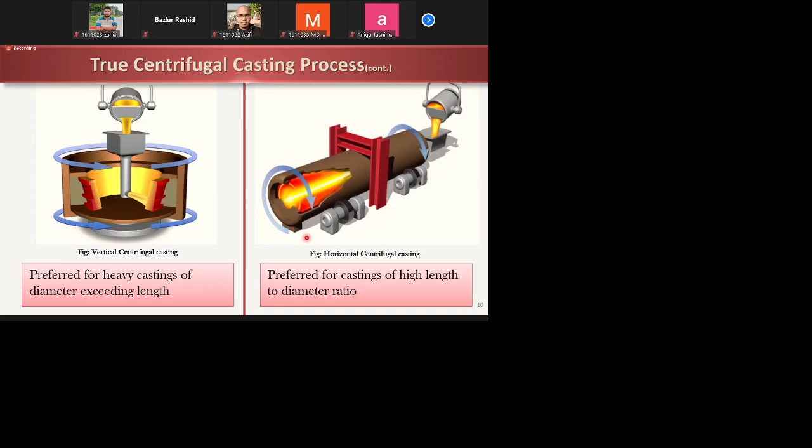If we talk about the basic mechanism of a true centrifugal casting process, the first step is application of coating to the inside mold wall with refractory slurries, sand, graphite, etc., so that the casting does not get stuck with the mold wall. After coating application and drying them, molten metal is poured directly into the mold.

The mold is continuously rotated at a predetermined speed. After solidification, the casting is extracted from the mold, and during this process, centrifugal force lets the less dense impurities move towards the center and get stacked up there. It can be easily removed by machining, grinding, or sandblasting.

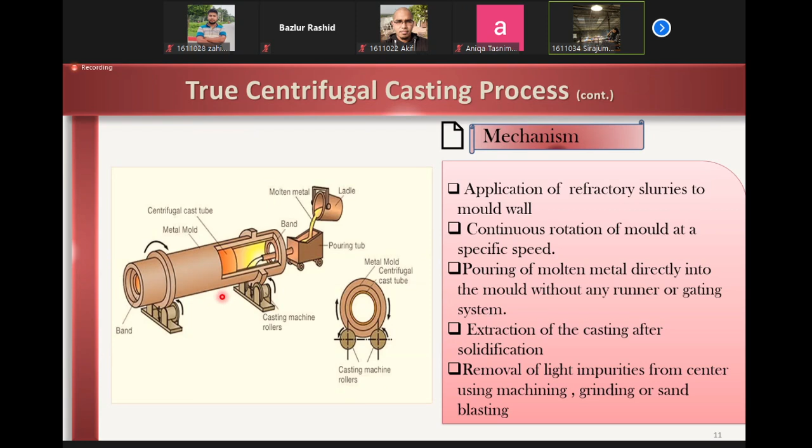The advantages of this casting process are many. Some of them include flexibility in casting composition, production of large castings, no use of core to make cylindrical hollow parts, no need of gates and feeders as casting is directly poured into the mold, and also few fettling costs.

Fettling means removal of unwanted metals or entities from casting.

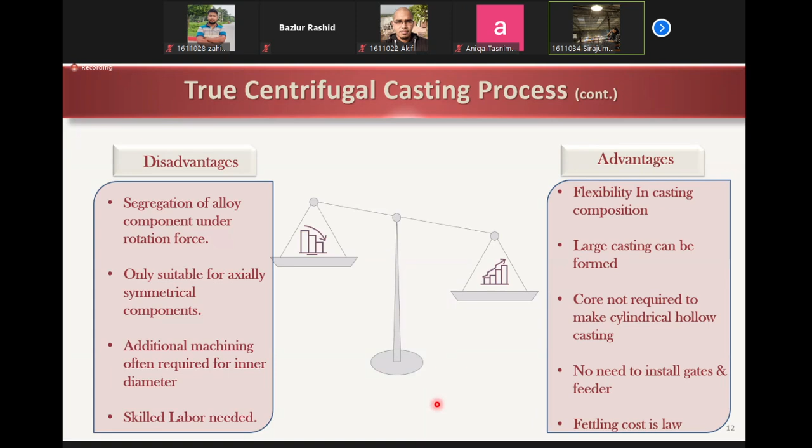This process has some drawbacks also, as centrifugal force compels lighter entities to move towards center. Segregation of alloy can happen. This method is suitable for only casting axially symmetrical components.

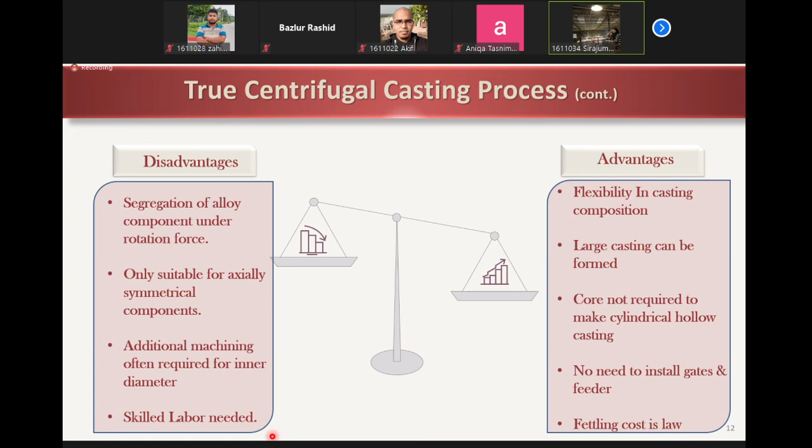As core is not used, inner diameter often requires secondary machining after casting. Also, this process requires highly skilled labor.

Now going to the next type, which is semi-centrifugal casting process. It is carried out on a vertically mounted machine at comparatively low rotating speed than the true centrifugal process. The main difference between true and semi-centrifugal process is that the mold is completely filled through a central sprue.

During casting, rotational speed ensures uniform distribution of molten material to the casting. More than one item can be produced at a time in this method because multiple molds can be stacked and fed by the central sprue.

Components like wheels, sheaves, blanks, etc. can be produced using this method.

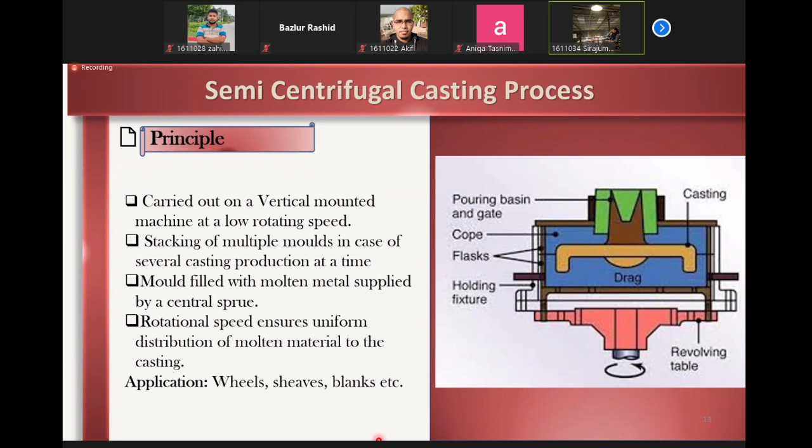The last one is centrifuge casting process. It is used to cast unsymmetrical castings in a group. Molds containing cast geometry rotate around the central sprue.

Runners are used to provide liquid metal to the molds from the central sprue. This whole structure increases filling pressure within the molds, which allows casting with complex shapes. This is economical in nature as many castings can be manufactured at a time.

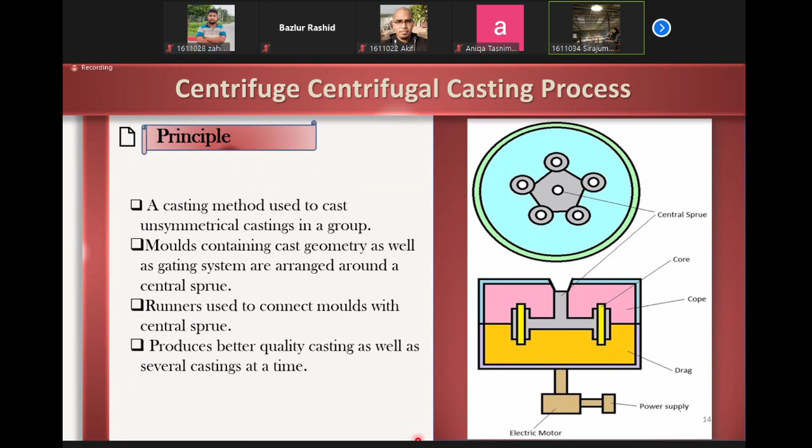Generally, in permanent molds, pouring temperature of molten metal is 40 degrees Celsius higher than that in sand mold. This is because of rapid chilling effect of permanent mold, and for the same reason, pouring rate, especially the rate at the beginning, must be very high compared to the sand molds.

At the beginning, the pouring rate must be very high compared to sand molds. Otherwise, cold laps and cold shuts may occur.

Also, it is always good to use a pouring funnel to ensure the entry of molten metal in the direction of mold rotation. It will provide better casting quality by minimizing turbulence.

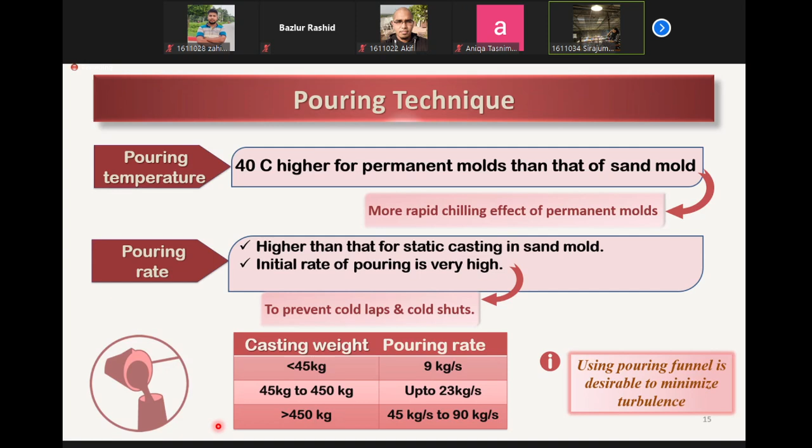We have already discussed about how directional solidification works in this process. Here, heat is only removed through water-cooled mold wall. And these are the parameters which influence solidification.

Parameters with greatest effects are mold thickness, mold wash thickness, and degree of superheat. How this affects local solidification condition will be discussed later.

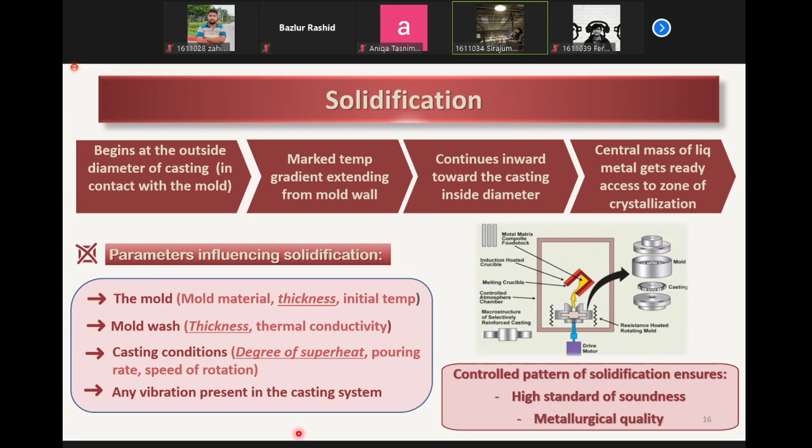Control pattern of solidification is very important as casting soundness and metallurgical quality greatly depend on it. As high feeding pressure is a must for directional solidification, obtaining this is the primary aim of the casting technique.

To take the full advantage of centrifugal force, mold cavity must be shaped or selectively chilled according to the principles of directional solidification to produce solidification from periphery towards the center.

Basically, central mass of liquid metal does the function of feeder head used in static casting. So it is positioned at the center and is sufficiently large to induce favorable temperature gradient.

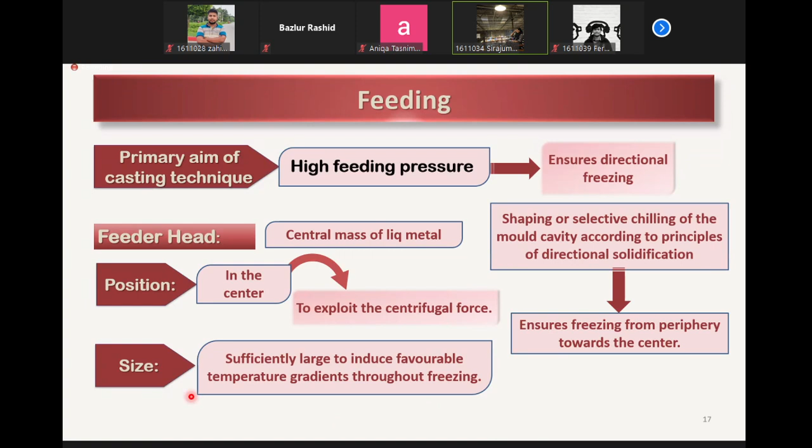Selection of mold is an important factor of this casting process. It basically depends on geometry and quality of casting and also the materials used to be cast. Usually permanent molds are used in centrifugal casting process, but sometimes expendable molds as liner are used also.

The most common permanent mold materials include graphite, steel, copper, etc. Among them, graphite molds are an economical alternative to sand for producing small castings, and steel molds are used to cast large quantities.

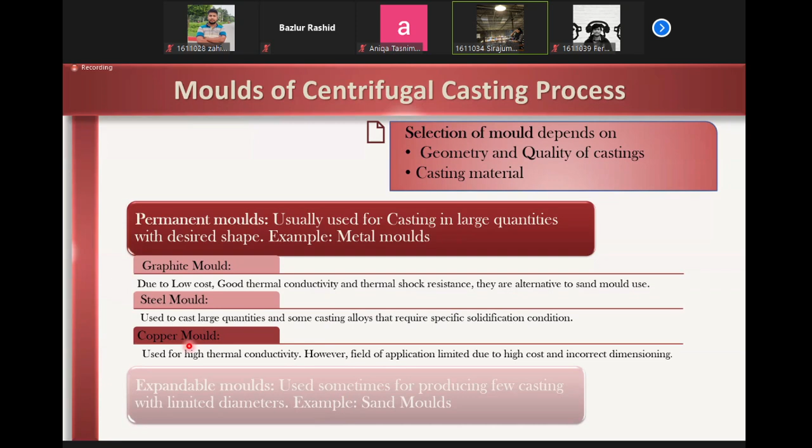The main variables that control casting quality are speed of rotation, pouring temperature, pouring speed, mold temperature, etc. At first, speed of rotation. The main effect of high speed is to promote grain refinement, although this can also bring about turbulence.

This is because of instability of the liquid mass at very high speeds, but it's better to use the highest speed of rotation possible without encountering hot tearing.

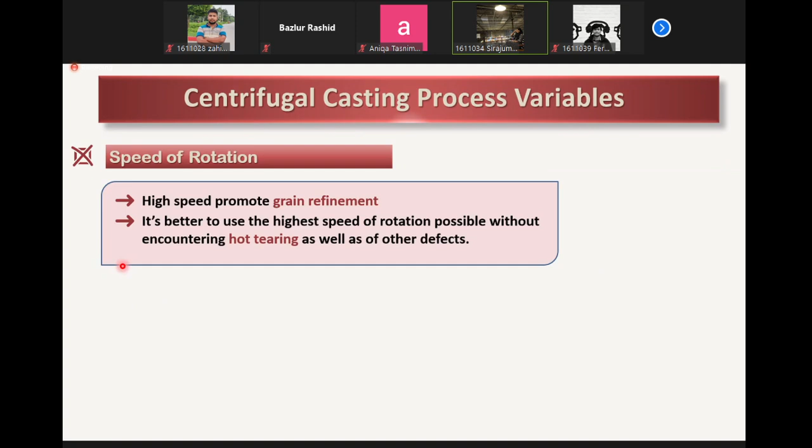Then pouring temperature. It has a major influence on the mode of solidification. Low temperatures are associated with maximum grain refinement with equiaxed structure, and high temperatures promote columnar growth in many alloys.

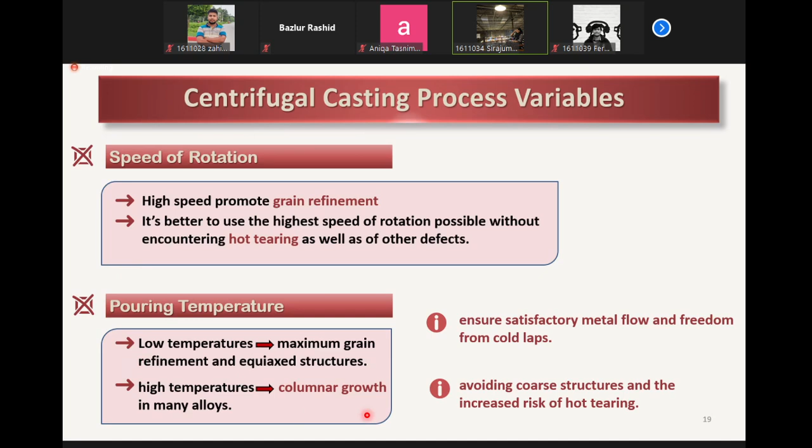The pouring temperature must be sufficiently high to prevent cold laps while still avoiding coarse structures and the increased risk of hot tearing. Pouring speed depends on the particular metal being poured, as we need to finish the delivery of the molten metal before the metal becomes sluggish.

Too high pouring rate can cause excessive turbulence as well as raining. Low pouring rate promotes directional solidification and feeding. It also reduces the risk of hot tearing.

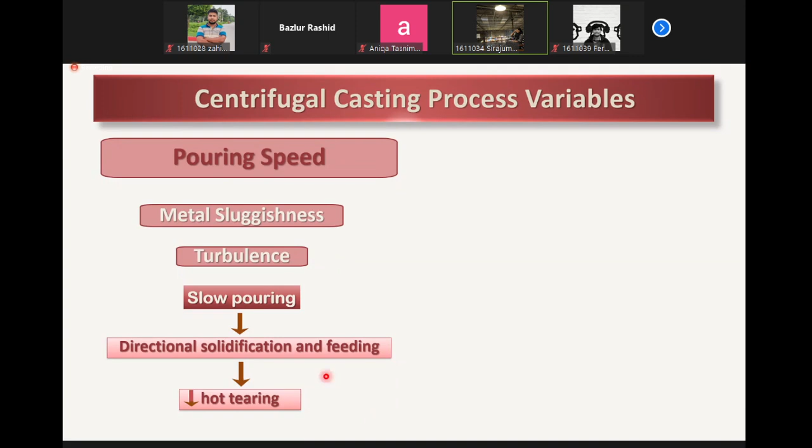Temperature of molds should be maintained in the range of 500 to 550 degrees Fahrenheit. Mold preheating to this temperature range will facilitate the application of the refractory mold coating. A uniform operating temperature is needed to ensure a quality casting.

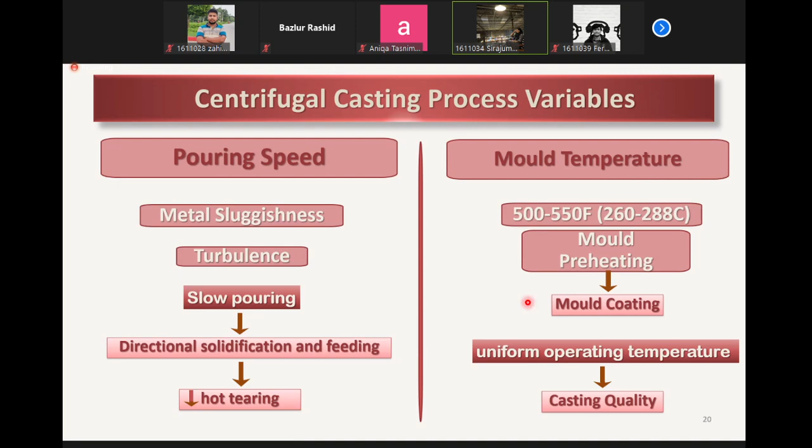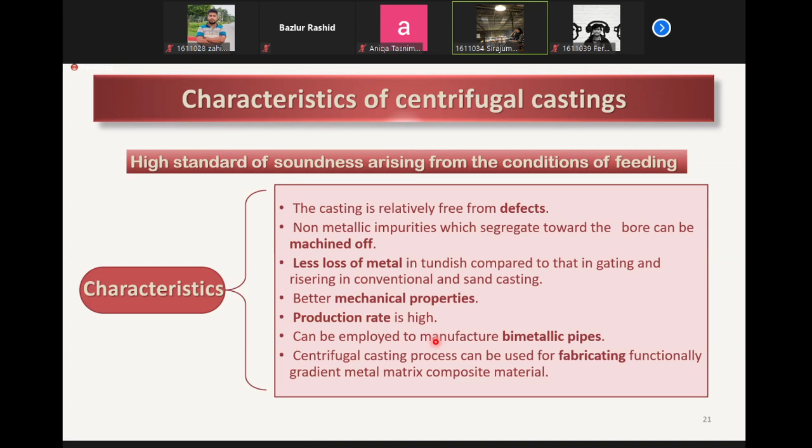Centrifugal casting is used where we require strength, reliability, and material soundness in the end product. The basic characteristic of centrifugal casting is that it is relatively free from defects. We encounter less loss of metal and the production rate is very high. Also, we get better mechanical properties, and this method can be employed to manufacture bimetallic pipes and other specialties.

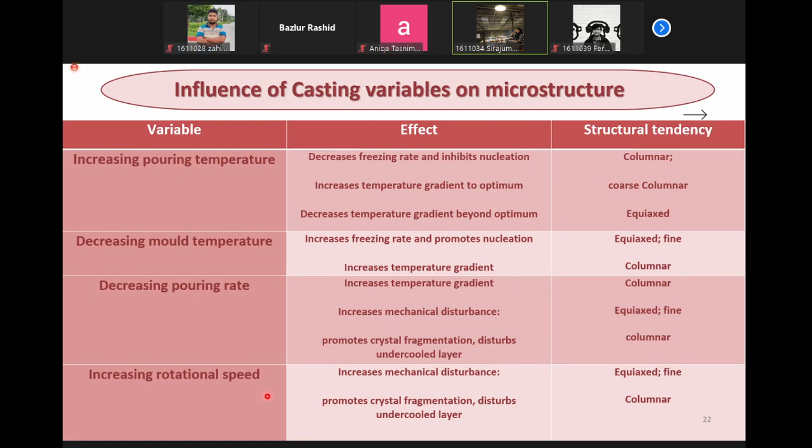This slide summarizes the effects of all the process variables on the microstructure of the final product. From this, we can see that if we increase the temperature gradient to optimum, we can get a columnar structure. And if we increase mechanical disturbance by any means, we can get an equiaxed fine structure.

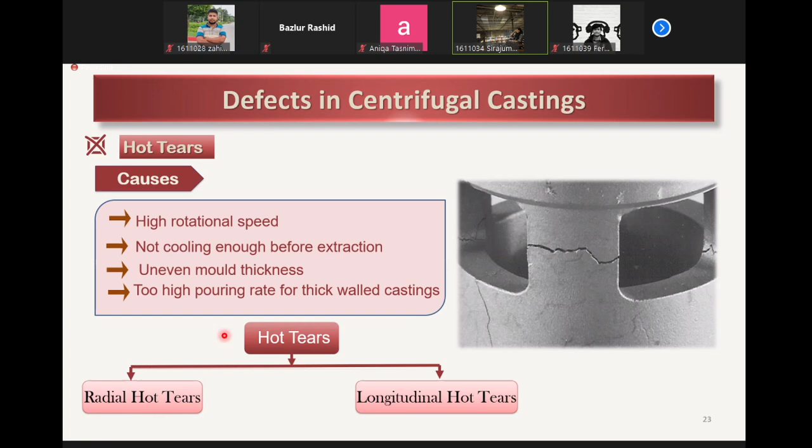A number of defects occur in centrifugal castings, which can be related to pouring, spinning, temperature, material, or coating. Hot tears are developed in centrifugal casting, especially for high rotational speed. They can occur across the circumference of the casting or transversely across the casting. They can be caused by several different reasons, like not cooling enough before extraction, uneven mold thickness, too high pouring rates, especially for thick-walled castings, etc.

So what can we do to remove hot tears? Firstly, we should check our water cooling nozzles. They should be free of debris and unblocked, so water can flow freely. Also, enough water pressure should be ensured, and applying more water and reducing spin speed sometimes help to solve this problem.

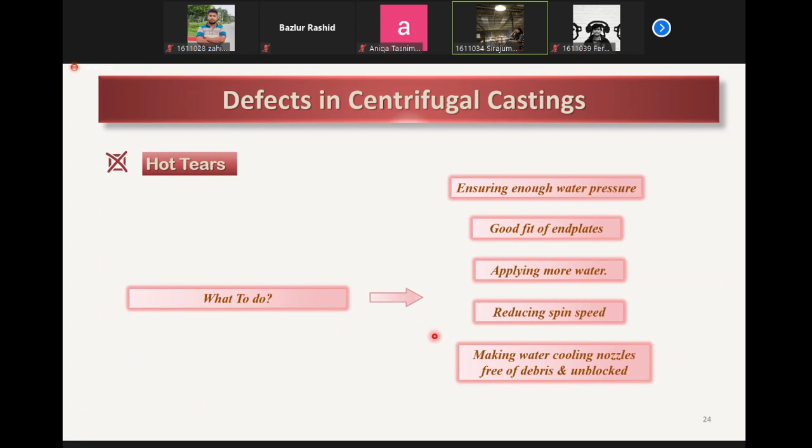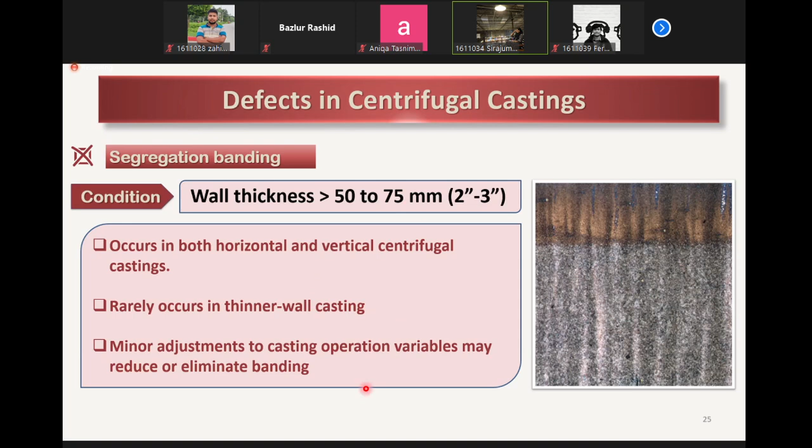Another type of defect is segregation banding, which occurs only in true centrifugal casting. Generally, where the casting wall thickness exceeds 50 to 75 millimeters, it rarely occurs in thinner wall casting. Minor adjustments to casting operation variables like rotational speed, pouring rate, and metal and mold temperatures will usually reduce or eliminate banding.

Raining is a phenomenon that occurs in horizontal centrifugal castings. If the mold is rotated at too low speed or if the metal is poured into the mold too fast, then the metal actually rains or falls from the top of the mold to the bottom. Proper process control can eliminate raining.

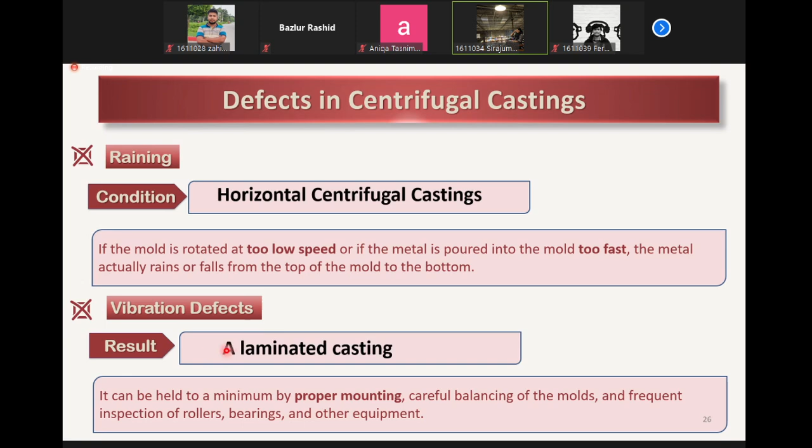Then the vibrational defect. Vibration can cause a laminated casting. It can be held to a minimum by proper mounting, careful balancing of the molds, and frequent inspection of rollers, bearings, and other equipment. Now let's look at the huge application sector of this method.

Regarding production of rotationally symmetric products, this method is a front runner, being used in mass producing blanks, pipes, etc., as well as in the cutting-edge aerospace industry. Another advantage is compatibility convenience. We can cast a variety of metals, alloys, and ceramics in this process. All in all, very versatile in adapting to industry needs.

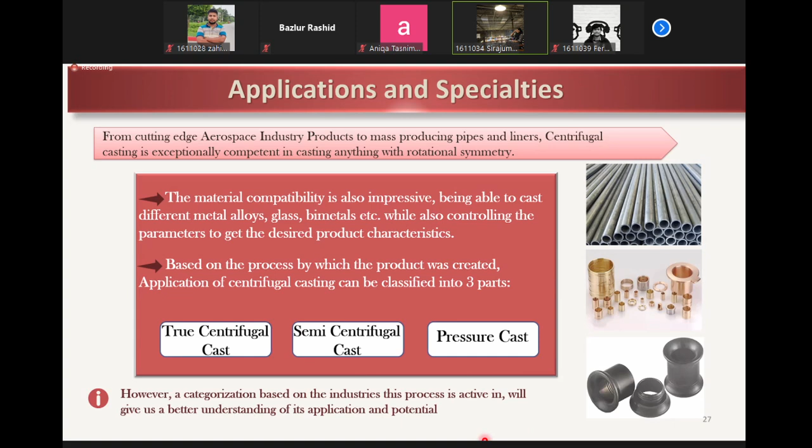Based on the production technique, we classify centrifugal casting into three categories: true centrifugal cast, semi-centrifugal cast, and pressure cast. However, looking at industries where this process is active will give us a more comprehensive understanding of the method's application and its potential. Here we take a look at the mass-produced products this process is responsible for.

Firstly, true centrifugal cast products can be directly obtained from casting or after a bit of machining. Pipes and tubes dominate this sector, but there are rings and liners as well. The semi-centrifugal process is mainly used for producing gears and gear blanks. And while the pressure centrifugal casting method produces intricate hinges, jewelry, biomedical apparatus, etc., a thing to note is the variety of materials that can be used here.

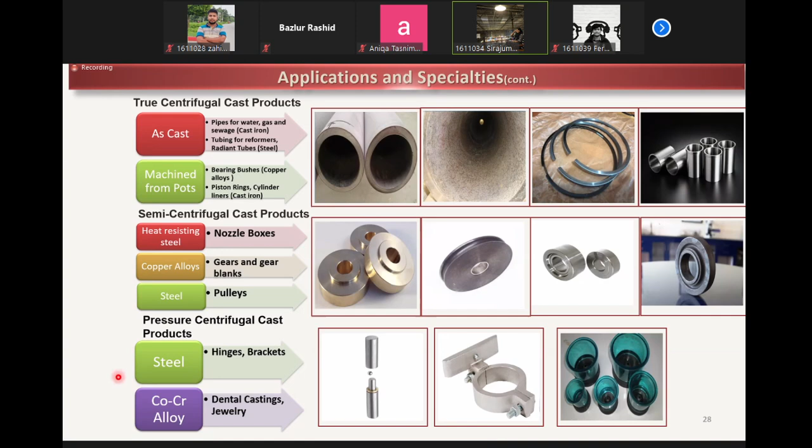Now we shift to the specialized high-tech industries. Precision and accuracy is vital, and centrifugal casting can meet those requirements. Aircraft manufacturing, from fuselage supports to drum brakes and many components of the engine, needs a lot of high-quality circular components that this method provides, like propeller hubs, cast rings, flanges, shaft sleeves, etc.

The automobile industry requires a high volume of mechanical components while also needing a certain degree of precision. Due to the quickness of the method, supply can keep up with demand. Some examples of automobile manufacturing are cylinder liners, piston rings, bearing bushes, etc.

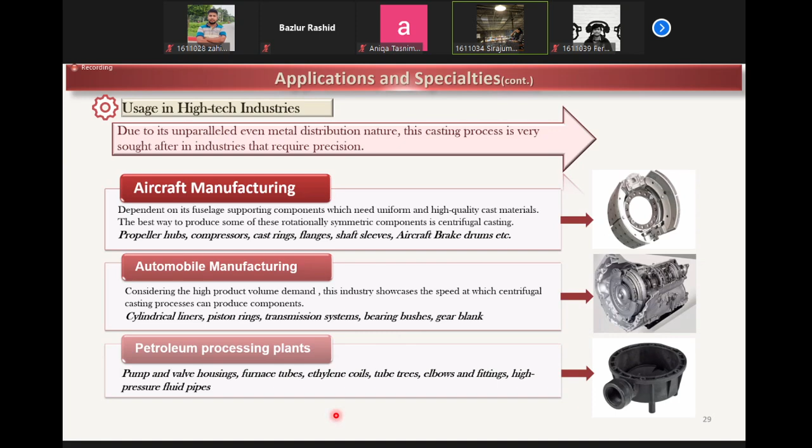And then petroleum processing plants. The examples are tubes, valve housings, high pressure pipes, etc. Long-lasting, high reliability components are needed in this industry.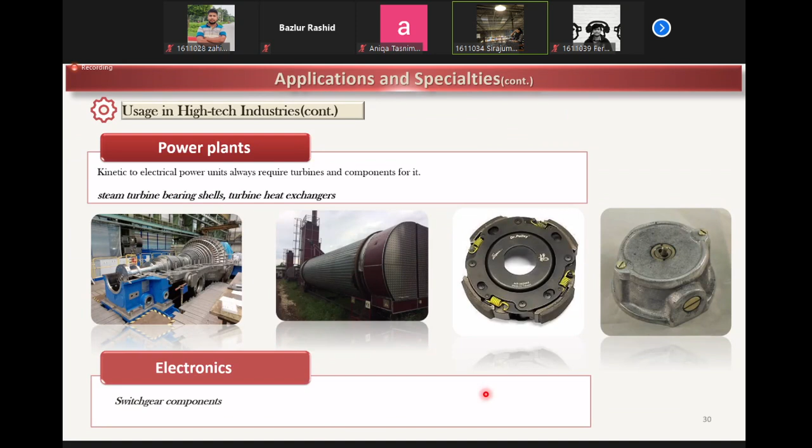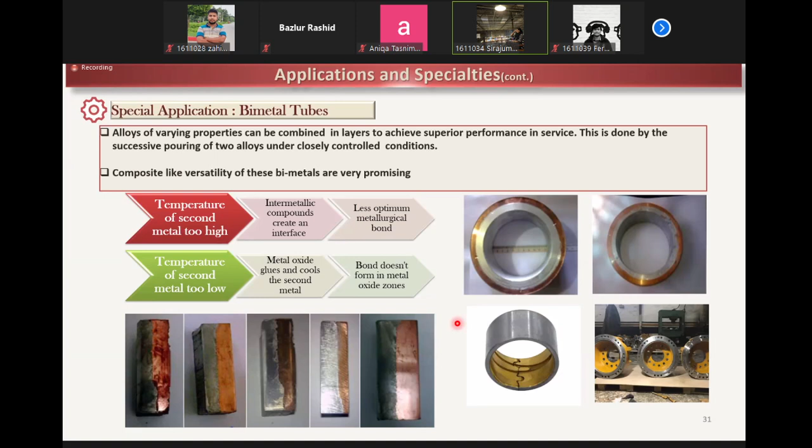Bimetals perform similar to metal composites. Alloys of different composition can be layered to produce specific mechanical properties. This field is still growing and new research is ongoing, but these conditions and variables for bimetal production have to be carefully controlled. Especially the addition of the second layer has to be temperature and speed controlled, otherwise proper metallurgical bonds between the layers cannot be created.

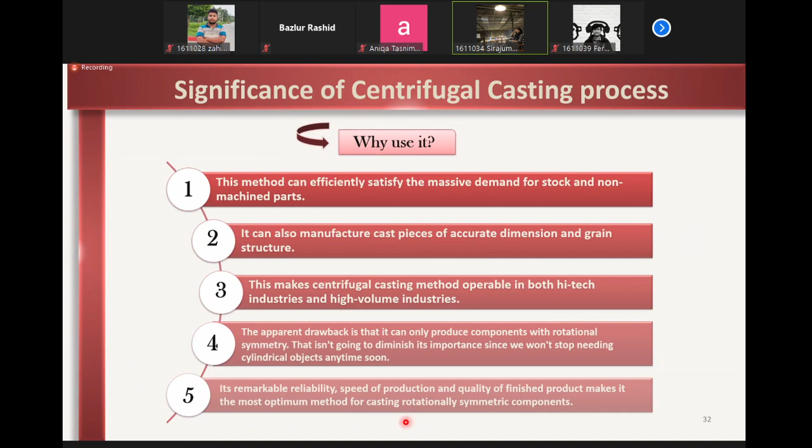This method is very well-rounded in its production speed and accuracy. While it can mass produce pipes and liners, it can also produce race car brake pads. This method is versatile enough to exist in both high-tech and high-volume industries. Geometry is limited here; only rotationally symmetrical objects can be cast in this process, but it is the most optimum way of casting this particular geometrical shape. Thank you.

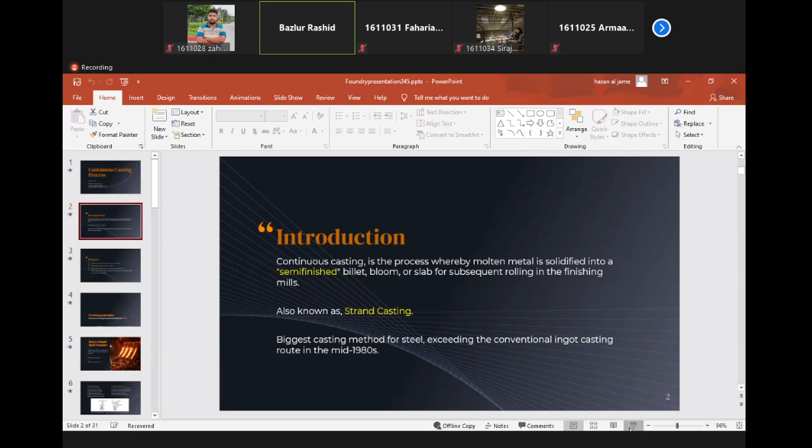The continuous casting process was first conceived by Bessemer in 1858. It is the process where molten metal is solidified into a semi-finished billet, bloom, or slab for subsequent rolling in the finishing mills. This process is also known as strand casting.

Continuous casting is very much in demand nowadays. If we look at the scenario today, most modern steel makers have continuous casting units, and they produce slabs, blooms, or billets from continuous casting, which are then further converted.

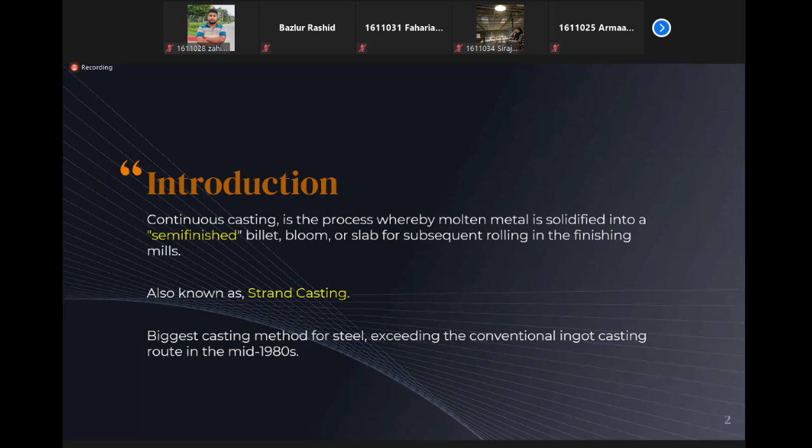So what's the main purpose of this process? For over a century, the traditional method for converting steel from the liquid phase to the solid phase was by using ingot molds. In conventional mold casting, we use a sand mold or a metal mold. The liquid metal is poured into the mold and allowed to solidify. This ingot is then taken for further processing, like reheating, and then its dimensions are reduced.

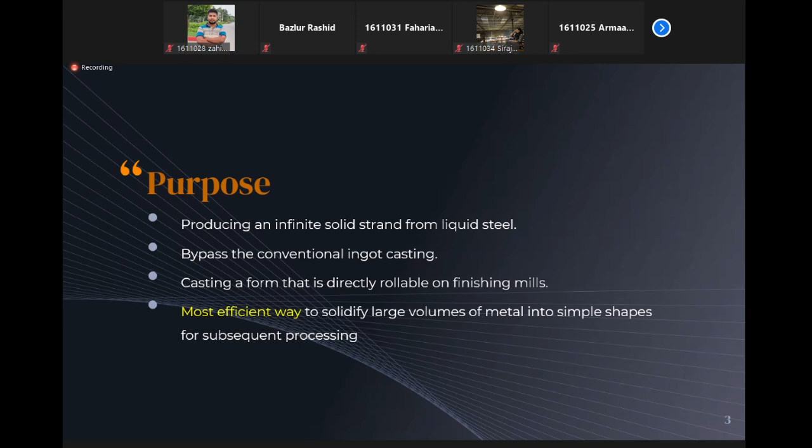All these steps are time consuming and energy intensive. The continuous casting process shows a way to bypass conventional ingot casting, and we can get casting in a form that is directly rollable in finishing mills. This is the most efficient way to solidify a large volume of metal into simple shapes for subsequent processing.

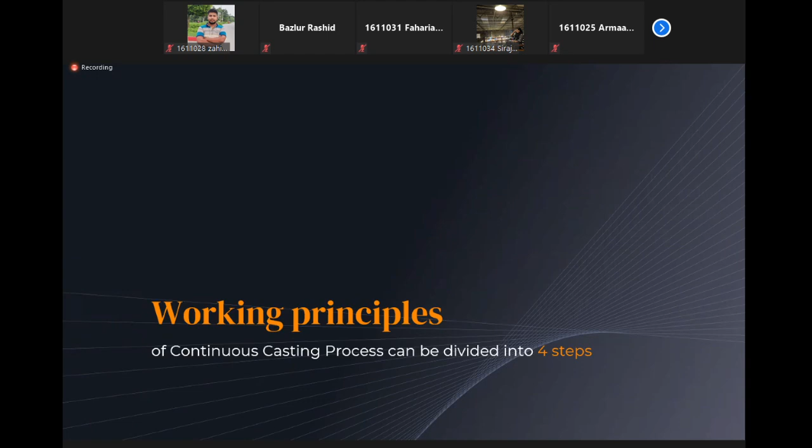Now let's look at the working principle of continuous casting, which involves four steps. The first step is the transfer of liquid metal from the ladle into the molds, and it is a two-step process: first, transfer from the ladle to the tundish, and then from the tundish to the mold. The liquid metal is transferred from the ladle to the tundish through a shroud located just below the ladle.

The shroud is submerged into the metal in the tundish. The tundish helps in the process of removing inclusions. The idea is to utilize the total residence time. Inclusion removal is done during that time, and it can happen in two ways: flotation, and absorption by adding flux on the tundish surface.

The tundish provides a continuous flow of liquid metal and maintains a steady height just above the nozzles that connect the tundish to the mold. Moving to the next process: the transfer of liquid metal from the tundish to the mold.

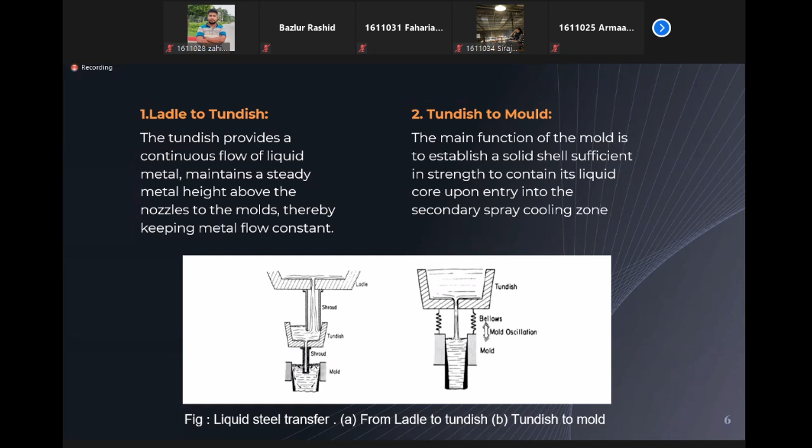The liquid metal enters the mold in the presence of flux through the submerged nozzle immersed in the liquid steel, and solidification starts at the mold. As I mentioned earlier, we add flux powder. Let's take a look at the role of this mold flux.

Mold flux is poured on top of the molten liquid in the mold. The flux then melts and penetrates between the mold surface and the solidifying strand to minimize friction, and it also provides lubrication. This flux helps in the absorption of inclusions and prevention of reoxidation in the mold.

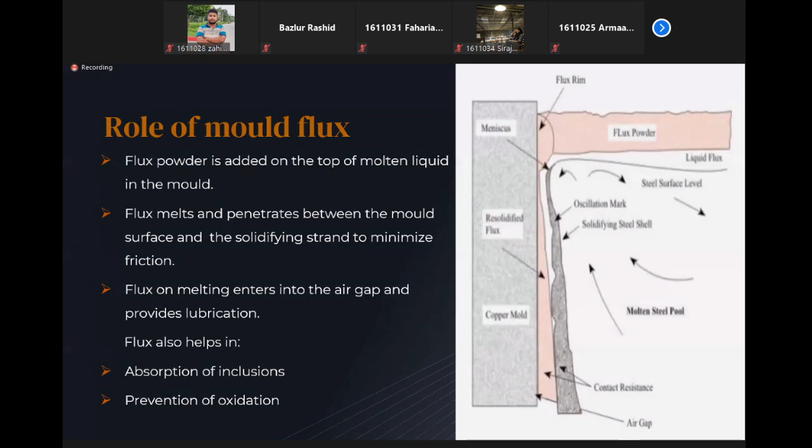The next step is the primary and secondary cooling. As you already know, solidification of the liquid metal starts at the meniscus level of the steel, and the molds in continuous casting machines are specially designed — water cooled copper molds. Copper has high heat diffusivity.

As the liquid metal enters the mold, a strand with a solid outer shell and a liquid core is produced. So the mold is called the primary cooling area, where the first cooling, or solidification, takes place.

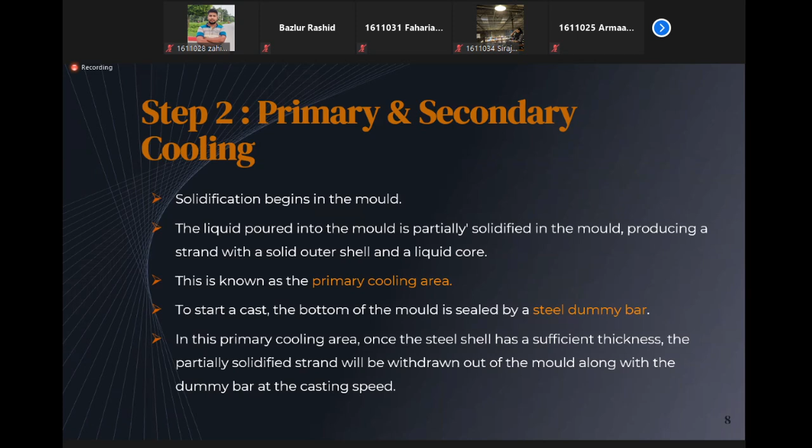To start a cast, there is a dummy bar placed just below the mold. Once the shell has achieved sufficient thickness and the strand has gained sufficient mechanical property to support the core, it comes out of the mold with the dummy bar in front at a set casting speed. It then enters the secondary cooling zone, a secondary cooling chamber, which consists of various kinds of water sprays.

We also spray a combination of water and air, referred to as air mist, between the rollers. In this region, further solidification takes place.

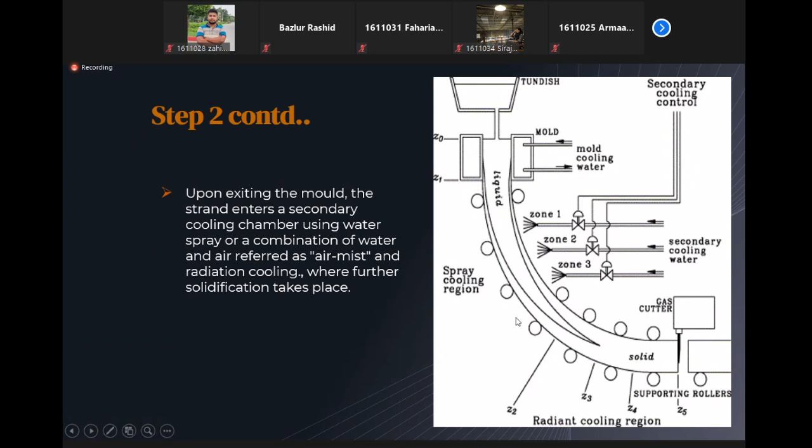Heat transfer is a major phenomenon in continuous casting machines. The distance from the meniscus, where solidification starts, to the cutoff stand should be greater than the metallurgical length, which depends on the rate of heat conduction through the solid shell and heat extraction from the outer surface, to avoid cutting into the liquid core. So casting speed must be limited to allow sufficient time for the heat of solidification to be extracted from the strand, ensuring it is fully solidified.

The conversion of molten metal into a solid semi-finished shape involves the removal of certain heats, like superheat from the liquid that enters the mold from the tundish by convection, latent heat of fusion through conduction from the solidification front to the colder outer surface due to the temperature gradient in the solid shell, and sensible heat transfer by convection from the solid shell to the mold. There is also external heat transfer by radiation, conduction, and convection to the surroundings.

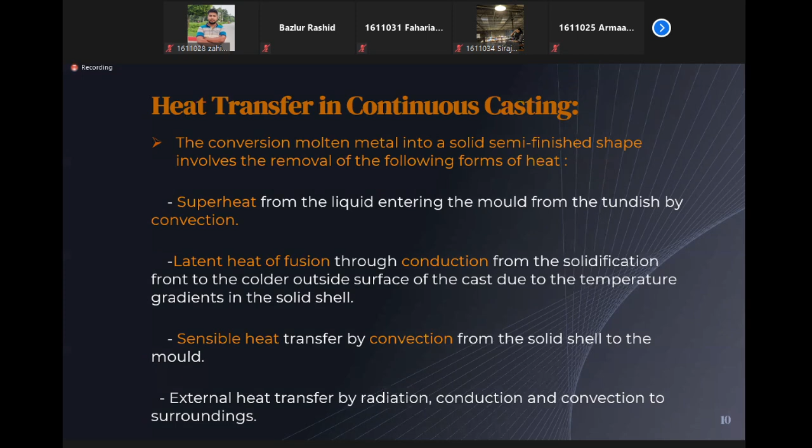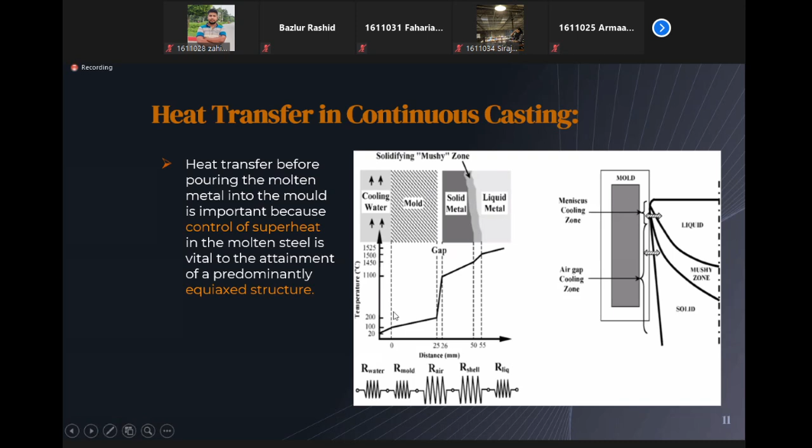Here is a temperature diagram showing the cooling rate. We can see the liquid metal, mold, and liquid-solid metal regions, and the temperature gradients between them. The heat transfer before pouring the molten metal is important, because controlling the superheat is vital to attain a predominantly equiaxed structure. As you know, a finer grain structure gives better mechanical properties.

Step 3 is bending and straightening. As the liquid metal comes out of the mold partially solidified, it enters the roller containment section along with the secondary cooling chamber, as mentioned before, with all the sprays cooling while further solidification takes place. In order to decrease the vertical dimension of the casting installation and achieve greater operational reliability, we use a horizontal or substantially horizontal direction by means of pressure rolls.

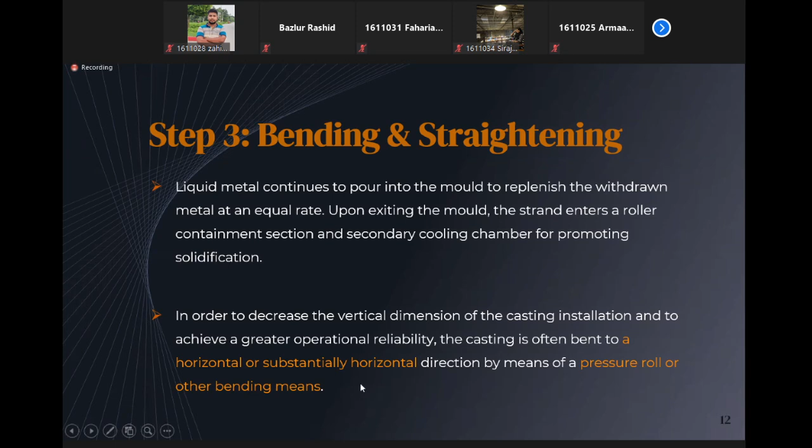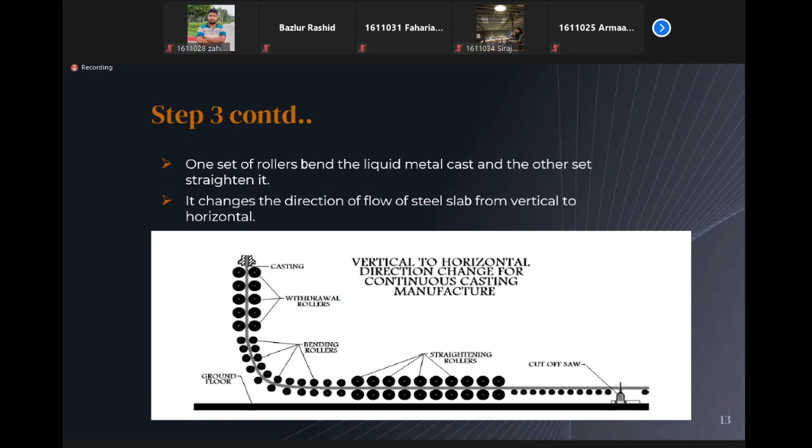There are different kinds of pressure rolls. One set of rollers is used to withdraw the steel strand from the mold, and another set just below it, the bending rollers, are used to bend the steel slab. Just in front of it are straightening rollers which straighten the steel slab before it goes into the final section. The main purpose of this process is to change the flow of the steel slab from vertical to horizontal. It's a completely automatic process, so we can control the effect and activity of the rollers to our benefit and shape the steel slab according to any desired width.

Step 4 is the final step, where cutting takes place. As the steel strand becomes fully solidified and passes through the straightener and withdrawal units, the dummy bar is then disconnected, removed, and stored. Following this, the strand is cut into individual pieces according to the desired length and shape, producing billets, blooms, slabs, and various casting products depending on the machine design.

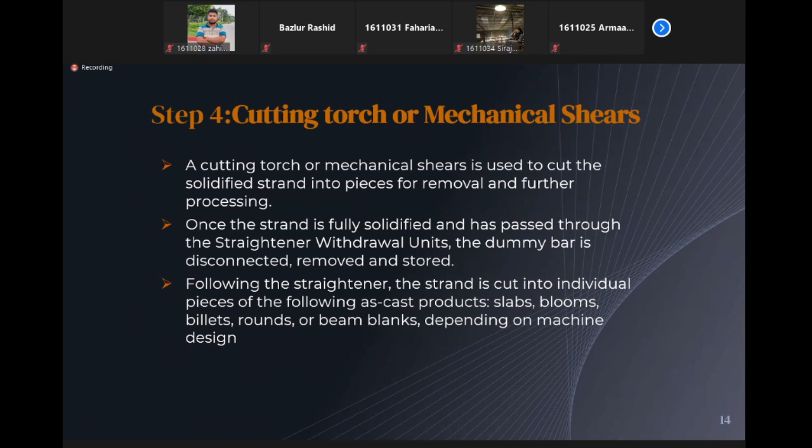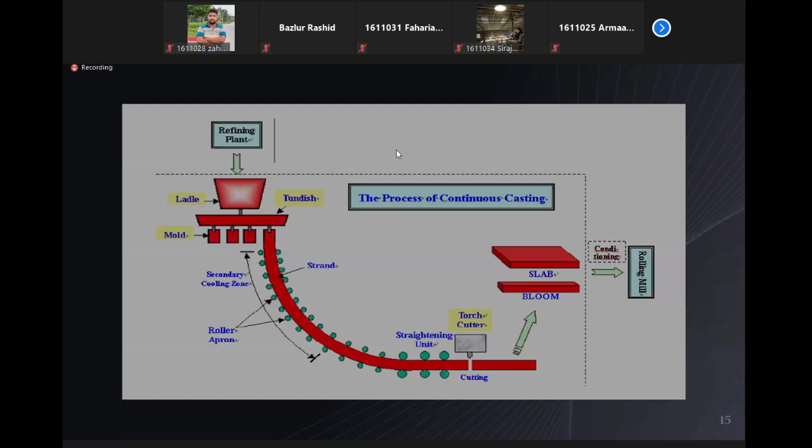This is a schematic diagram of the whole process in one single picture. Moving on, let's take a look at the different types of continuous casting machines used now: vertical casting, horizontal casting, strip casting, and curved type casting. All of these are shown in this figure.

So I'll shortly talk about the machines. In vertical casting, as shown in the diagram, the whole machine operates vertically. The metal comes from the ladle to the tundish, then through a nozzle into the water-cooled mold, and casting proceeds smoothly downward through the rollers just below the mold. The huge advantage of this process is that it allows upward flotation of any metallic or non-metallic inclusions present, ensuring higher internal cleanliness of the final product and greater finish.

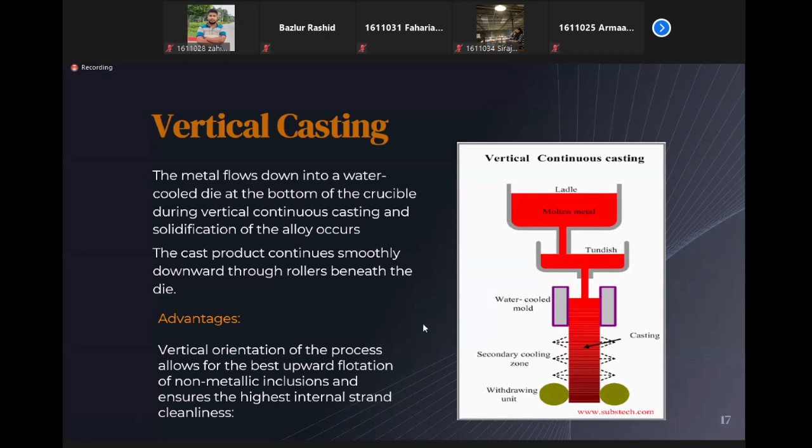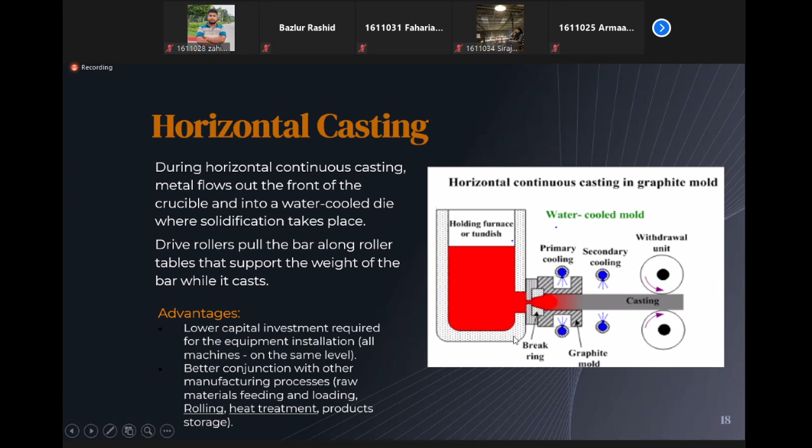Then there's horizontal casting. In this case, the liquid metal flows out from the tundish or ladle through a nozzle located in front of the container, then enters the mold where solidification takes place, and the rest of the process is similar to what was mentioned earlier. The advantage of this process is lower capital investment required for equipment installation, and better conjunction with other manufacturing processes. Then there's strip casting.

Strip casting is comparatively newer than the others. Steel sheets are conventionally produced by continuous casting, hot rolling, cold rolling, and annealing. But due to recent development and progress in the twin roll strip caster, it's now possible to produce thin sheets directly from molten steel. It's mainly used for production of hot rolled steel sheets, as after thin slab casting, the thin slabs pass through the soaking furnace and are directly hot rolled in-line into strips, as shown in the pictures here.

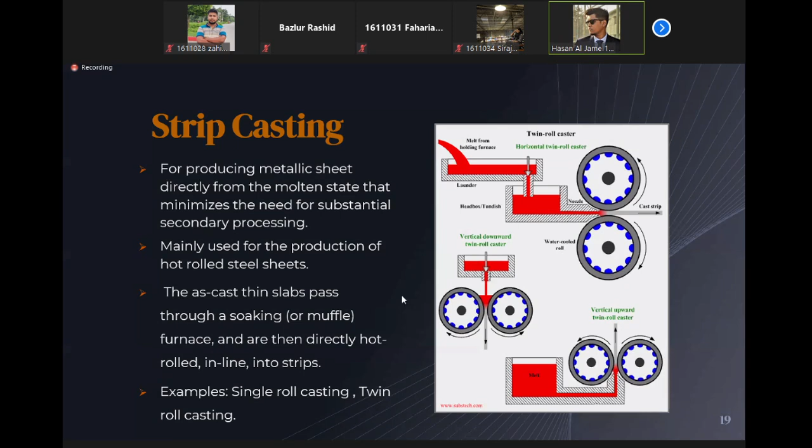It can be single roll casting or twin roll casting. The advantages of strip casting are that it supplies the band with the same geometry as hot rolling, so hot rolling is not necessary and we can easily bypass it. Casting and hot rolling are combined into one continuous process, and the rate of solidification is comparatively higher.

So refined microstructures are achieved with greater mechanical properties. Another great advantage of this process is that it's possible to cast steel sheets which do not have sufficient intrinsic ductility for rolling, like high silicon steels, intermetallic alloys, or high carbon steels. Moreover, it's very efficient, economical, and environment-friendly, because there's elimination of other energy-intensive processes, which makes it financially better.

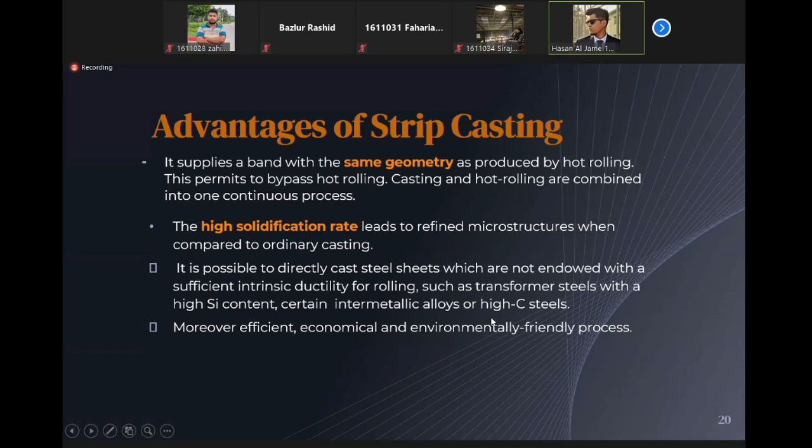Finally, curved casting. The majority of steel all around the world is cast using this method. We have already discussed its working principle before. It's used for high quality slabs of carbon, low alloy, and other steel grades. The molds are the heart of this process, and as we mentioned earlier, they're copper molds.

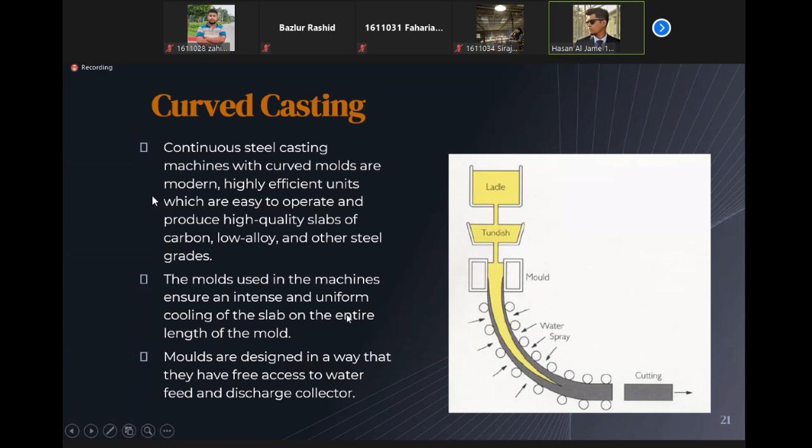They have free access to water feed and discharge collector. The molds ensure an intense and uniform cooling of the slab along the entire length of the mold. So the advantage is that the output is twice as much as other methods, as I mentioned earlier, so the efficiency is greater.

With almost double the slab withdrawal speed, whole automatic control of the process, and inert gas pressure in the mold volume, a wider range of slab sizes and high quality slabs are achieved using molds of special design. Another great advantage is that the pressure observed during withdrawal of steel slabs from the molds is lower compared to other machines. As a result, the risk of the thin solid crust on the outer surface of the steel strand being torn off is less.

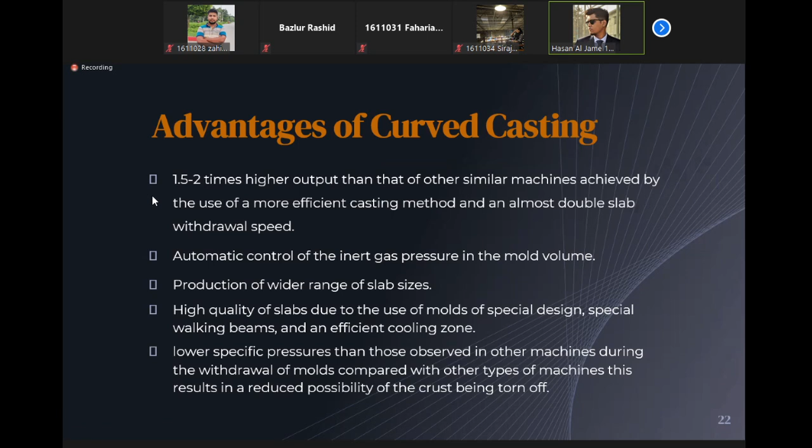I've always mentioned that we are nowadays using continuous casting prior to... instead of ingot casting. So we're going to look at why it is better than ingot casting.

The cross-sectional area of an ingot casting is much larger than a strand produced by continuous casting. The reduced area in continuous casting decreases the likelihood of cracking due to tensile stresses generated by internal thermal gradients. The reduced area also implies a higher cooling rate, so there is less time for segregation to occur and more chance of obtaining a complete solid solution.

The refined microstructure of products with better mechanical properties are found in the continuous casting process. The liquid metal comes in contact with air much less than in ingot casting, and as a result less inclusion is formed and less scrap is generated in continuous casting. So the product is comparatively cleaner, and with a cleaner product, greater yield can easily be achieved.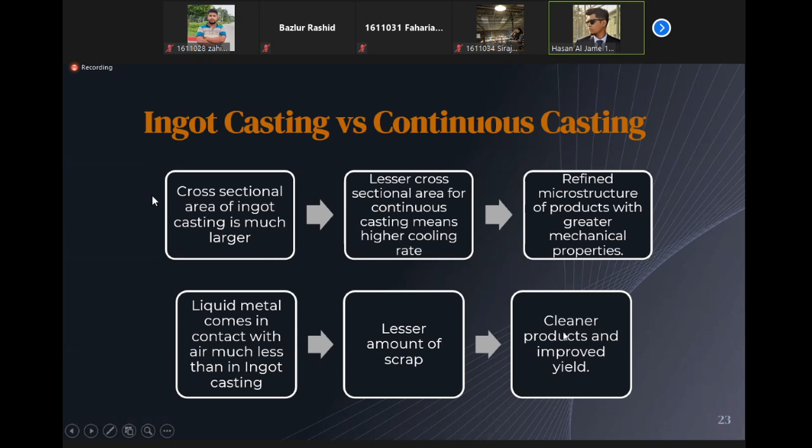One of the major problems of ingot casting was pipe formation due to solidification shrinkage, which causes metal and energy loss mainly. But in the continuous casting process the pipe is not formed, and the product is cut off as per required length, so metal loss is much less than ingot casting. In continuous casting, metal loss is actually minimum.

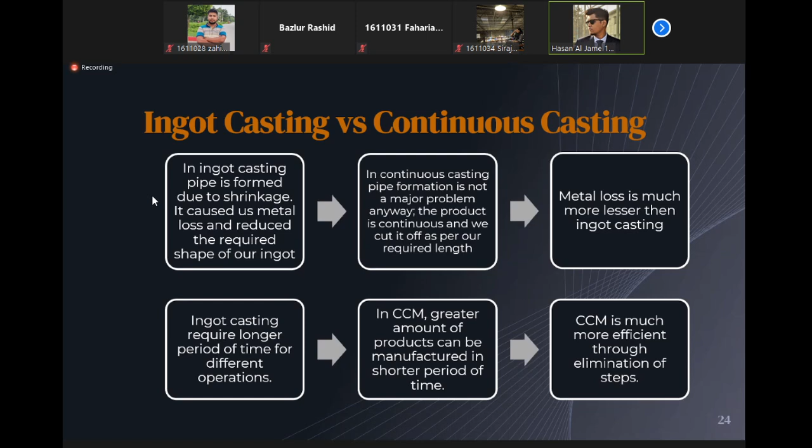In ingot casting, it also requires a longer time for different operations, but in continuous casting, large amounts of products can be manufactured in a short period of time. So continuous casting is more efficient than ingot casting.

Now let's look at some advantages of the whole process. The continuous casting is energy saving. The continuous casting process saves energy directly through the elimination of energy-intensive steps, as I mentioned before, and indirectly through increased yield.

Then reduced pollution. This process is much more environment friendly because soaking pits and reheating furnaces are avoided and eliminated here, so the energy required is saved, and pollution in this process is comparatively lower.

Then we can easily find slab width; we adjust the slab width with the downstream of the strip mill. Continuous casting also offers a superior surface finish and virtually eliminates internal porosity and centerline shrinkage. It ensures uniform production of metal objects, whether we want 10 tons or 10,000 tons of products, the products will always be uniform in shape, size and length. In the end, it is cost effective for large scale manufacturing.

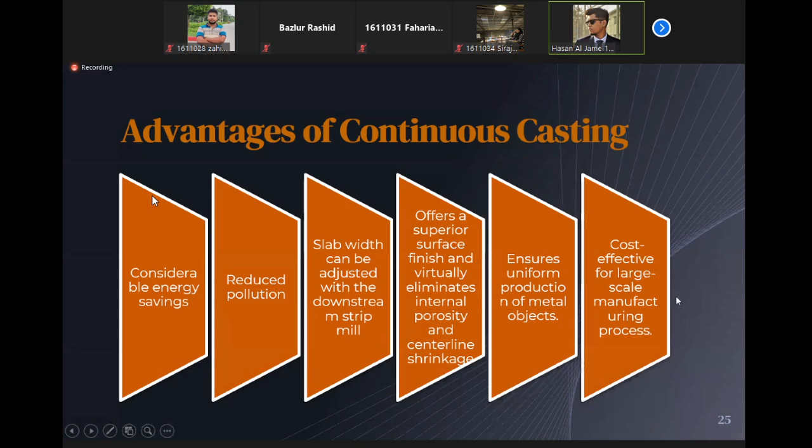There are also some limitations to this process. It requires a higher capital cost and large ground space, and it is not suitable at all for any kind of small production.

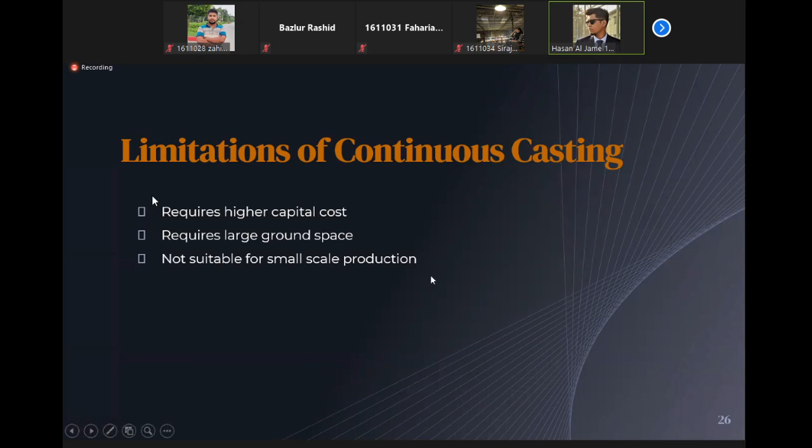Billets occasionally suffer a range of surface defects needing expensive and time-consuming surface grinding, and in severe cases even downgrading or rejection.

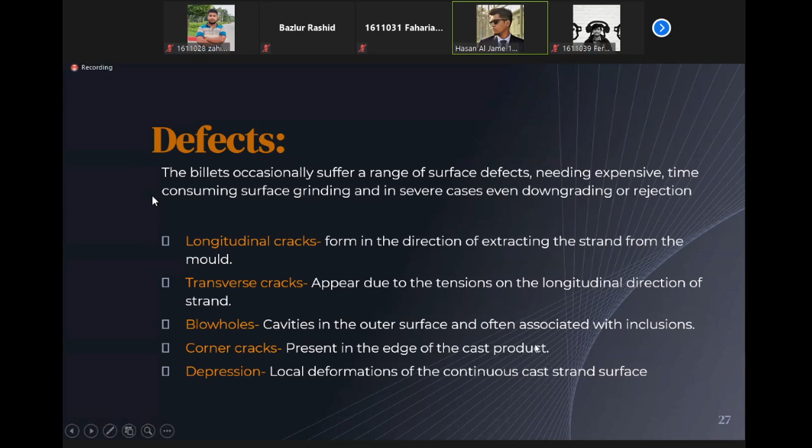Some kinds of cracks are longitudinal cracks forming in the direction of extracting the strand from the mold, transverse cracks which appear due to tensions in the longitudinal direction of the strand, blowholes or cavities in the outer surface often associated with inclusions, corner cracks present at the edge, and depressions which are local deformations on the continuous cast strand surface.

Now let's look at some measures to improve the quality of this process. The flow of liquid metal has to be controlled, since excessive speed of liquid metal can cause it to entrain the molten slag and create inclusions. Ultimately the product will lose its cleanliness, and many kinds of surface defects or inclusions can form, downgrading the quality of the product.

Heating the molten metal in the tundish is one of the recent technologies used. This heating can be done by induction heating or plasma heating, and it compensates for temperature fluctuation due to ladle to ladle distribution.

The working surface of the copper mold is often plated with chromium or nickel to provide a harder working surface and to avoid copper pickup on the surface of the cast strand, which can facilitate surface cracks on the product. That's why we also use mold flux, as mentioned before.

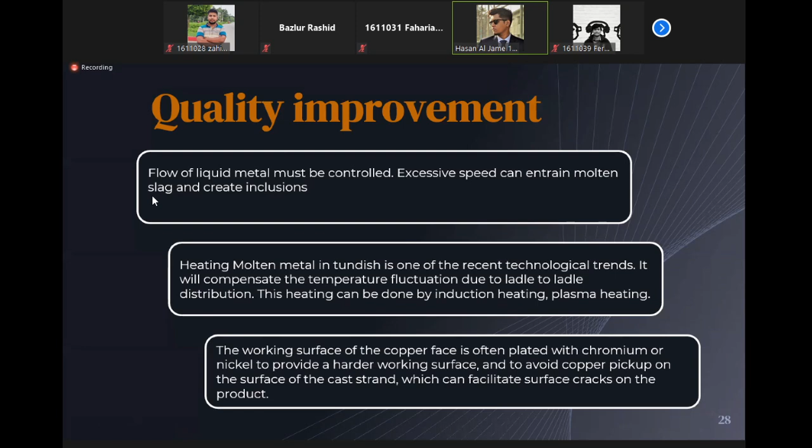Regular oscillation of the mold prevents the molten metal from sticking to the mold, and using mold flux increases lubrication and decreases friction between the mold surface and the cast strand. Low oscillation frequency has its own problems, like the skin breaking or surface cracks forming, and oscillation marks being formed on the product.

The liquid metal must be protected from air by using a molten slag layer. Otherwise an oxide layer will form, which will act as an inclusion and create defects in the products. Finally, changes in the temperature gradient that occur across the solid shell, due to abrupt changes in the heat extraction rate, cause differential thermal expansion in the solidifying metal.

This results in the generation of high thermal stress and strain, which can ultimately lead to internal or surface defects that severely compromise the quality of the cast product.